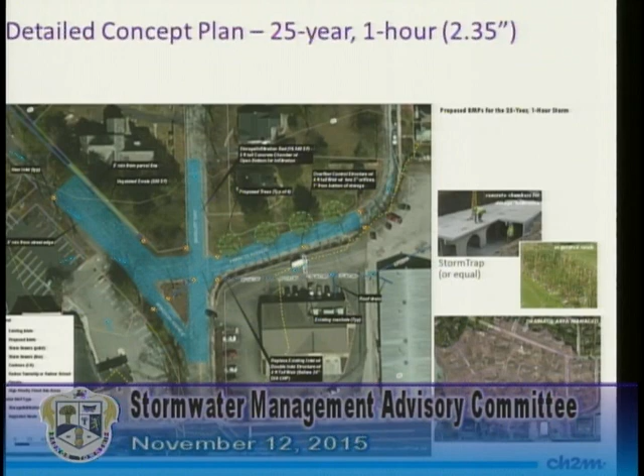I just have a few slides tonight. Wanted to start with a quick recap for those who maybe missed the board meeting the other night. This is the updated concept plan for Banbury, Francis, and Windsor, BFW. I presented a couple different options depending on how much storage we want to provide—whether it's a 25-year 1-hour storm, about 2.4 inches, the 10-year 1-hour at 2 inches, or the 5-year 1-hour at about 1.8 inches. Different options here, each with somewhat less storage, less depth required, and less area required.

Someone noted at the last SWMAC meeting that utilities were an unknown, and that may come up in the design phase of this project if it gets to that. So one of these options may need to be explored at that point—less storage to make way for utilities.

I presented these updated costs and flood reduction percentages. We gave a low and high-end cost for the project depending on the option, and the corresponding reduction in local flood volume depending on the storm event. The 25-year option, storage for the 25-year storm, will reduce 100% of the flood volume up to the 25-year storm, whereas the first option, for the 5-year volume, would reduce the 25-year storm volume by about 56%, just to give an idea.

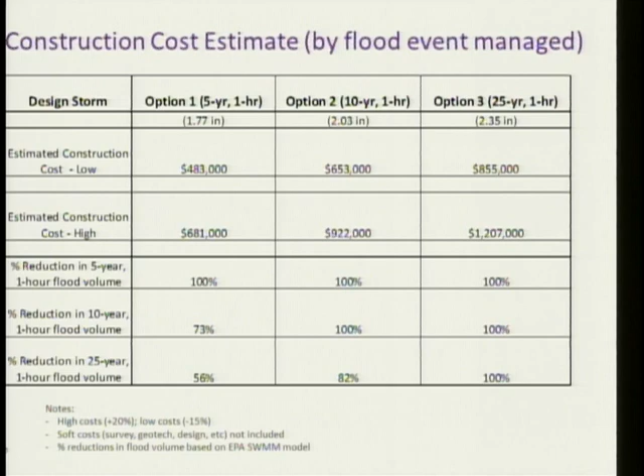The reason being is that the 25-year storm is so infrequent, and the flooding that we have tends to be almost like a flashy flooding. So some of those things, we just have to kind of keep that all in mind. And it depends, like say at this location, I'm in support of option 3. The reason being that this takes the load off of the downstream system as well. So it's not solely for this location that you're providing that additional storage. So it works harder for us when we're in these locations.

So I think you can't have a blanket 25-year, 100-year. I think it's got to be case by case. Look at the configuration, what's the land that you have available to you. Utilities are going to come into play here. Maybe 25-year isn't going to be feasible because of the additional cost, because we run out of space. We know we have some space because there's a system there already. So I'd be cautious. I mean, we could have a goal of 25-year, but I'd be cautious to make that a fixed standard. Sure.

I think the information you provided was enough so that we're comfortable at this point that, hey, this is a project that we feel is worth doing. But I agree with Regina, it is going to be site-specific. If we can, though, I think a 25-year storm is a really good goal, considering budget, location. And just for a comparison, I think Hurricane Sandy was on the order of 2.2, 2.3 inches. Now, that was not over an hour. And I didn't include the photos here, but at the board meeting, we had the photos of this site, I think, during Hurricane Sandy, and actually there was maybe another storm in there as well.

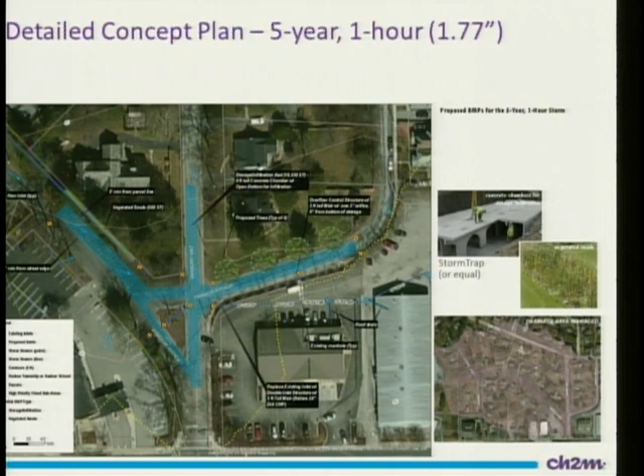The other thing I meant to mention, Commissioner Schaefer, I think her main comment was that she actually liked the idea of the bioretention. So taking up part of Windsor, closing that off, and putting in a bioretention there. That was something that Commissioner Schaefer, I think, wanted the SWMAC to reconsider. And I don't know if that's entirely up to us. I mean, I think that's something that the township has to decide if they're going to close a road. And if that's something the township and the residents want, then obviously we want to put in a BMP there.

Mm-hmm. Whether we close the road or not, any opportunity we can do best management practice, we could. But I think the township and residents need to decide first, to make that call before we can say yes, we can do it, or no, we can't. Well, honestly, I don't know that we can justify the additional cost and loss of efficiencies on this location. Obviously, we want to see that type of work where it makes sense, where you have extra space and things like that.

You know, you can put in bioretention facilities for very little money if you're not tearing up a road to do so. And already, you're going to have to establish that whole ground. You know, this is compacted roadway. It's not an ideal location to start that kind of a project. You know, we're not going to get the value out of our money if we pick locations that are very difficult.

I hate to use the middle school as an example. When we decided to build our middle school on that site, that drove the cost. If we were to build that middle school somewhere that didn't used to be a lake, I'm sure the construction cost wouldn't have been $50 million or whatever it ended up being. So that's the kind of thing where you have to be patient and wait for the right location and the right opportunities so that we can get our dollar value.

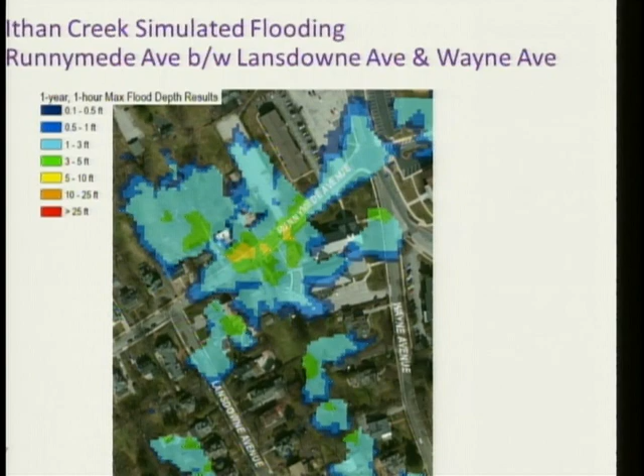And we talked about targeting these two public parking lots. The one to the west, owned by the school district, the one to the east is a township parking lot. I think, Regina, you had mentioned that. You thought that was school district. So this is the concept plan we came up with. We have a model for this using EPA SWMM, so a little bit more of a detailed model, since we do have more storm data in this area. We have that from the old base plans that were developed for the Radnor Middle School project. So a lot of this information is known.

So we are still in the middle of modeling this, so I just want to note that we don't have final results yet. But the idea here is we would have a system that could start up on West Wayne with a new inlet. We believe we might actually be able to pick up both sides of West Wayne in the system, but right now the concept plan is just showing the south side. Runoff would enter in, and it would kind of cascade down a series of stepping storage chambers, ultimately coming into a larger chamber at the bottom.

We did see some opportunities to integrate some green infrastructure into this, some bioswales. Currently, this is just a relatively flat asphalt area. There's no trees, there's no landscaping. So there's an opportunity there to break it up a little bit with some bioretention, some bioswales, possibly some new trees along the western edge.

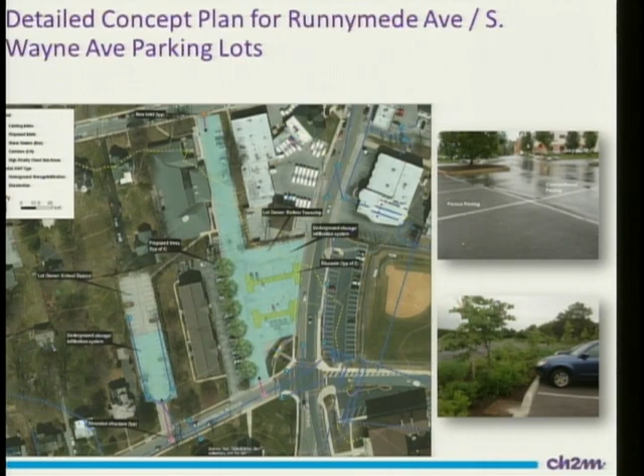And like I said, we're in the process of modeling this. This is a graphic from our SWMM model showing some of the pipe networks that we know exist. As we get closer to the middle school, we have more detailed information. Some of these outlier pipes, we do have some diameters and inverts, and we were able to use that.

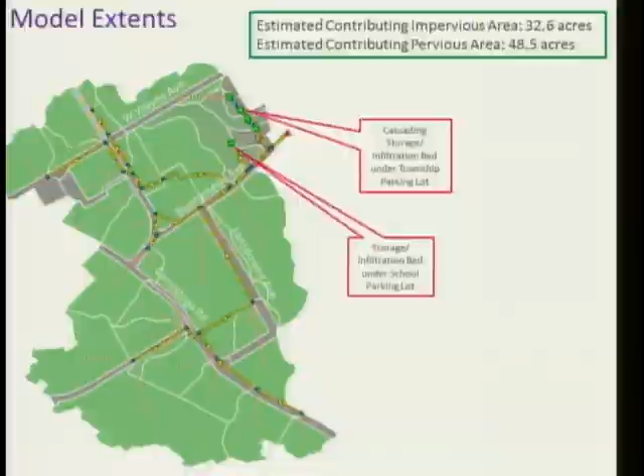Dan, there's some of those inlets, I don't know if you have them in your system or not, in grass areas. And they're not really functioning very well. And there are some inlets and even sometimes manholes that surcharge. So that's something you're going to want to find out a little more about, because the system is so overtaxed. The pressure from upstream is actually coming out of inlets and out of manholes in those locations, especially near the library. There's something in that section between the library and, I think, the school district parking lot.

Okay. That surcharges. So that's the kind of thing we just need to know. FYI. Right, yeah. I might be able to walk around there and figure out where it is and give you a little more.

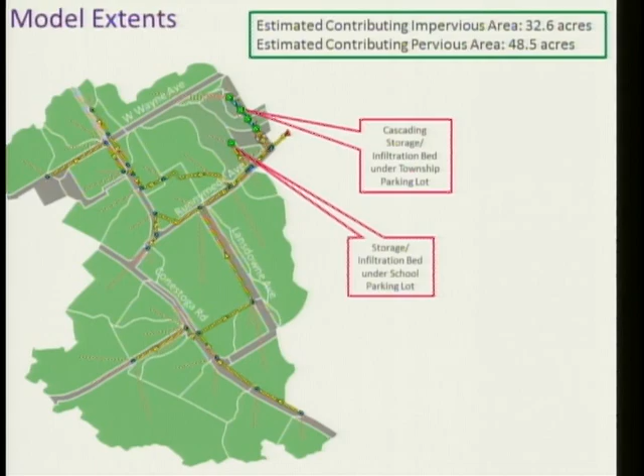Perfect. I should mention too, I think there were some discrepancies between this piping layout that we got from the old base plans from the middle school project and what the township data is. I believe specifically in this area here. We deferred to the base plans from the middle school projects. Was there a survey done recently? I thought there was some survey. Chagrin Valley did survey.

Originally, they were going to do a study here, and we pulled that from them, but they did a certain amount of survey work, so I had them send that to Dan, so he didn't duplicate any efforts. Right. And there's some overlap, but that's mostly up in here near the fire station. Okay, so that's mostly up in this area.

For instance, in the parking lot, do you have grades in that parking lot? Do you have good grading? Because that's got some crazy grading going on in there. In this parking lot? Yes, we do. Okay, good. That was part of the survey for the middle school. Yeah, I said it was flat, but what I meant was it was just a sea of asphalt, essentially. But yeah, there is some slope to it, you're right.

Yeah, absolutely. That's the reason the township has been waiting for this for so long, and one of the reasons we haven't spent a lot of money on that parking lot, because it was always anticipated that there would be a parking lot with green and trees, and it wouldn't look like it does. So this is music to a lot of us here for sure.

That's the thing too, when we are considering proposals, obviously we're trying to incorporate pedestrian safety, green space, and as we talked, the bioretention facilities, things like that, in order to make it make sense for the community. You might as well get the most for your money.

That's a great point, and that might even be an issue along West Wayne here. There's really no defined sidewalk. It just kind of blends right into the parking lot. So the idea of creating landscaping, again, bioswales, that kind of defines the sidewalk, I think, a bit better.

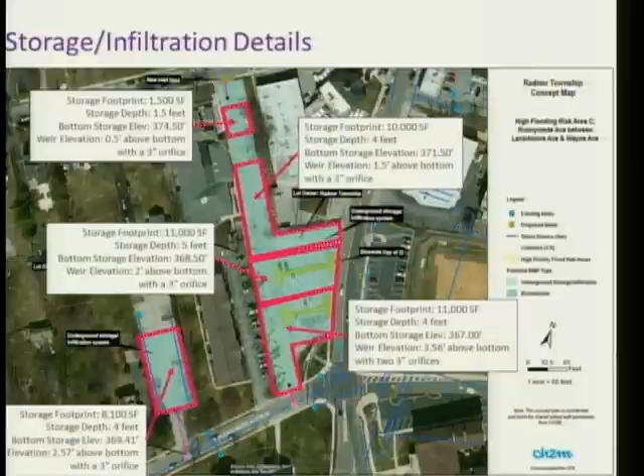Madam Chairman, if I may make a request. As in the emails I sent out, we have a very limited window for preparing any changes to the 5-year budget. In reality, we have to complete it tonight, and I have to submit it tomorrow. So I would request, if it so pleases the board, that we go to the budget portion. We have Dan's spreadsheet set up on the laptop, so we can physically adjust things with this board. You can see it live, and you can vote on it tonight. And then I can submit that to Bill White.

And not to, but I just thought maybe ODP could get very long. It won't take that long, actually, but we have literally no wiggle room on this. If the board wishes to amend this budget, we have to do so tonight. Could I go back to Runnymede for a second before we end with that?

I understood that we were looking to go upstream, so why aren't we looking up the hill from this place, as we have done with Banbury Way? I think we're looking at available space in this case. And also, I think it was a bit of a safety issue. There's flooding at the school, there's flooding at the firehouse, so on top of just the flooding in general of that area, it's a bit of a safety concern as well. But I understand what you're referring to, Paul, is that you would like to see it done uphill.

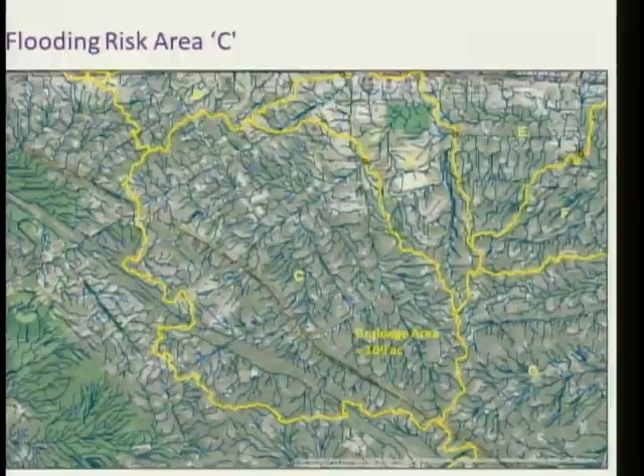Madam Chairman, if you do wish to go to the budget. Yeah, I think we should, if they need something by their next meeting. A very quick presentation to go over some items on those 3 projects I mentioned to you folks, and then you can. I think before we even talk about the new projects, maybe we need to understand what we're moving where on this list, because I don't know that you're going to move anything, but it's incumbent on me to bring this commission things that come up. Right, no, I agree. I kind of want to understand what has to happen on this sheet. You may not wish to change anything at all.

So there was a little confusion with how things went on Monday, as far as if it's on this budget and the budget is approved, then we don't go to the... Right, exactly. Is that correct? That is one of the pages of the 5-year capital plan. And if that goes Monday night and goes through the process and is approved, your 5-year budget as shown is approved. The only reason I brought this up was because at the meeting, I think that you folks watched, there was some additional modeling that was requested of Dan. And then the question gets posed to the commission, would you like him to include the ability to do that in some of the other studies you have asked him to do, which could conceivably change that price?

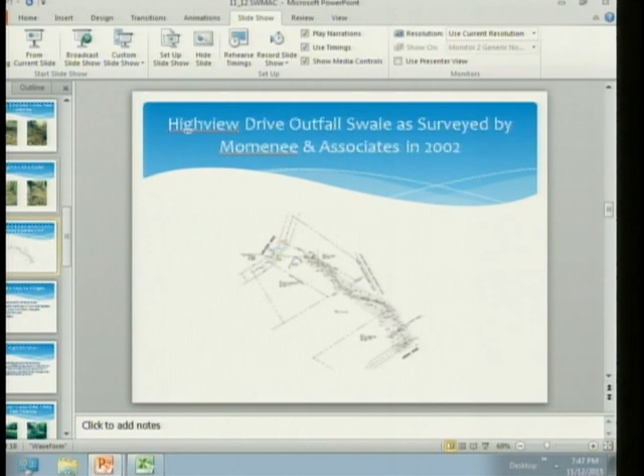This was brought to our attention by a resident who lives on Highview, who asked us to come over and take a look at this, and we all said, wow. It's very tough to access - it's between a house and a driveway to get there. As imaginative as we can be, there are ways to address these swales.

Paul's thought: reduce the volume of runoff to the outfall. Usually these outfalls are connected to an inlet at a low point in the road and taken away. So conceivably, you could work uphill of that, try to reduce flows, try to infiltrate - that's part of it. You can pipe the outfall, pipe a piece of it, or pipe it completely.

Some pipe, in this case, will have to be replaced. You can plant it, you can armor it, you can have check dams, you can have micro pools - there's a million things you can do on these swales. Got to reshape the swale. At one point, part of it was a trapezoidal swale; now it's just totally eroded, and it's erodible soils.

Or all the above. So my recommendation to this board - one of the ways we trip ourselves up is we try to give project costs before any amount of time has been spent on design. It's a somewhat nebulous number, based on some actual facts, but that's not including a lot of things we find out when we actually start to design. Do we need an easement? What does that entail? How hard is the permitting? What's the access going to do?

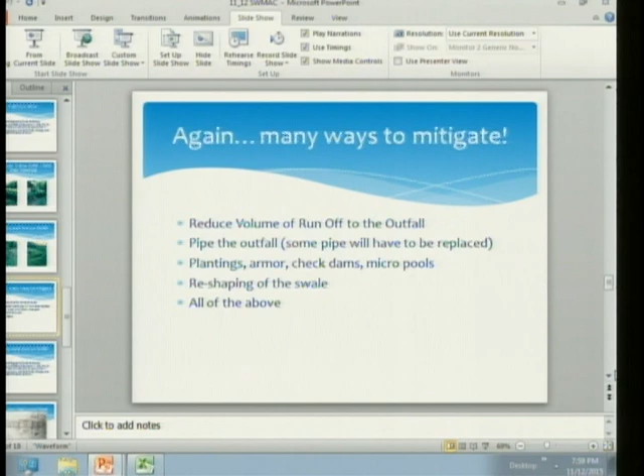There are concerns from the residents around there. They are concerned with their children. This would be a lot tougher to try to fence because it would be very odd to fence so much of this.

So I think the study's going to show that we get sizable flow down here. But we don't need the study to tell us we have this eroded swale that is a concern to the residents that live around it. And where we place it, or where this commission places it in the scheme of things, is going to be up to you.

So this one was another one where I'd request that we do whatever we need to do as far as bidding documents, design, survey, all that good stuff next year, and then move into that process to get a probable estimated cost of construction, and then go into '17. That's just my recommendation. But I don't have a recommendation on the construction because I don't know what we're going to do.

The next one is Mill Dam. I'm assuming everybody's familiar with the Mill Dam, right? So Maplewood Avenue, which runs along Mill Dam, is actually the dam embankment. About two years ago, I noticed the road settling, and we did some investigation, and we really didn't see anything. I saw it again last year, and it brought concern to me.

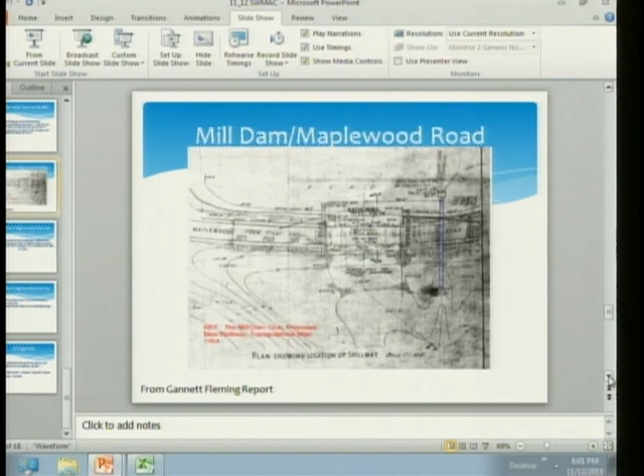So we went to the board, and I asked to have Gannett Fleming come out. Had some geotechs come out and take a look at it, and we further refined that and requested a proposal for their dam group to come out and see what is wrong with this, which they did. You do have the report, and the reports are on the back table.

So just real brief: the bottom line is there's an abandoned, I think 33-inch, what we call a stovepipe that runs through the middle of the dam. It's leaking, and it's causing the subsiding of the road.

They provided some numbers - let's get back up. They provided us with numbers in that report. So they said the permitting, design, and bidding documents would be roughly $45,000. And the construction, they gave a range of 150 to 200. I used the 200. And on a project like that, we would have to have daily inspection all day. We can't do dam work with partial inspections of somebody stopping by every couple hours.

Again, my recommendation to this committee would be that in 2016, we move forward with that design and permitting to get this project done. This is another safety project, and I'm not trying to alarm anybody, but obviously if the dam failed, that would be problematic to the people downstream. We actually do have a plan for that, and that's required by DEP, for what occurs if the dam starts to breach or fails.

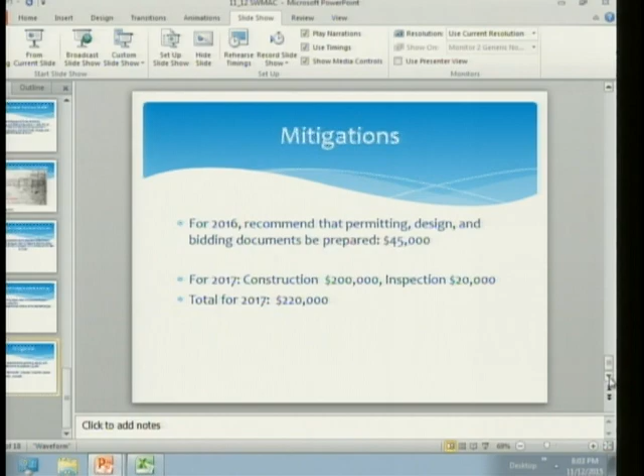And then my request and recommendation would be for 2017, we move forward with the construction and inspection, which would be at $220,000. So is this the township's responsibility? Does Mill Dam, does the club hold any responsibility? Does DEP consider them to?

No, this is ours. So the Maplewood roadway is the dam. The roadway is the dam, and it's a township road, correct. So it's fully owned by the township. And there's actually a sluice gate, and in the documents, we do have an agreement with Mill Dam, and we're actually responsible for all of it. We pay for the annual maintenance of that gate to make sure it raises and lowers, but actually a gentleman who works at Mill Dam is the one who raises and lowers it, because he lives 300 feet from there.

Do we know what hazard classification this dam is? It is not a high hazard dam. Okay, so is there any residential in the inundation zone? Oh, absolutely, yes. If this dam failed downstream, there's homes that would be inundated. Like I say, we actually have an emergency action plan. Because then wouldn't it be high hazard then? I don't believe it's classified that way by DEP. I may be wrong - I didn't put them in here, but there are DEP inspection reports as part of that report, and that's where it would be listed.

But a high hazard dam, so Earl's Lake, right, is a dam that they've been trying to decommission for 5 years. And it has issues, and it is considered a high hazard dam. That doesn't mean there's threats to life and limb, although there are people that live literally feet from the spillway. So that term high hazard is used differently in the dam world. But make no mistake, if this dam were to breach in a heavy storm or fall apart, that would be problematic downstream. Regina, just explain the implications of high hazard versus what, low hazard?

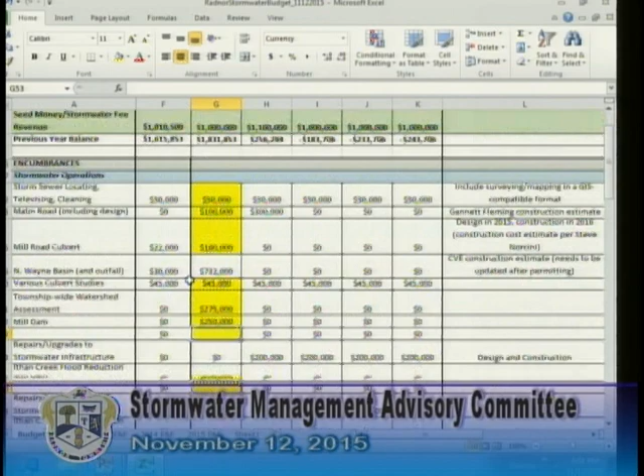I agree. I just had a discussion with Dan, we don't have 2.5 million to spend. Or am I missing something, Dan? Well, it looks like the stormwater administrator costs might not be on this version. Is that right? I don't know, we gave you everything we had. No, but those costs come out of here also, absolutely. So I think what Paul is saying is that the 2015 balance in this version was 1.8 million.

Dan, you bring up a good point. We need to include your year 2 costs, which were, I think, 70-some thousand. Right. It's in the spreadsheet. But am I seeing it here? It's not in this version, I think.

Well, I think one thing right off the bat is the Wayne train station. I think it's great to try and partner up, but when I see projects like this that are screaming for attention, that 30,000 has to go somewhere else. I concur. I'd love to partner up, I'm not saying it's a dead issue, but if we're going to do the worst flooding and the most severe infrastructure projects, the Wayne train station, in a perfect world, would be fantastic to do. So you just want to move it out a year? Or move it to something else.

You have to do something with the 250 you just added. Right. So I'm saying just put 0. Push these back. So four years from now? Well, no, what I'm saying is that it would start in 2017. Right, that's what I'm saying. Just shift it over one. Shift it, right. Both of them over one, just copy and paste. I guess you can't do that.

So the design would be in 2017? Design and construction, or just design? Just the design, and then the construction would be out one more year. Because who knows if it's ever going to happen? For my own edification, so we're talking about the Wayne train station enhancement. Right, because that was something we were going to partner with.

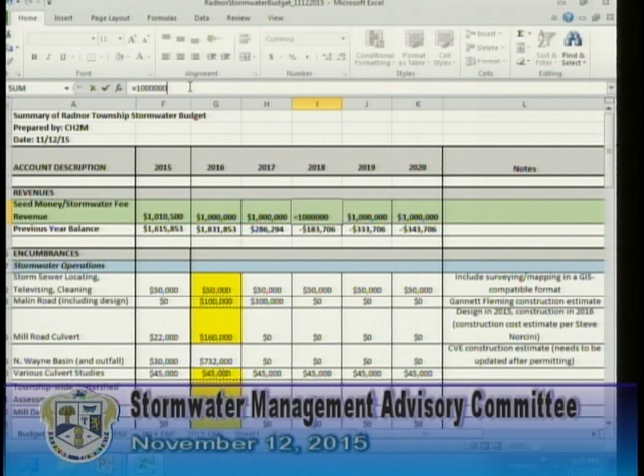So we had $100,000 from PICO, right? I thought it was SEPTA. Pardon me? SEPTA, sorry, yes, SEPTA, my apologies. We had $100,000 from SEPTA, and the township, as part of that, agreed to kick in the design cost. Now, that design is underway, right? We've already spent money on it. So that 30,000 has to stay, is that what you're saying?

Yes, I do. Well, I guess the question is, how far along are we with it? I'd have to check the bills, but we're probably halfway. Remember I was telling you folks in the email, we haven't been able to do our infiltration testing yet? But we have a preliminary design on that. Well, if we've got a preliminary design, I hate to just cut it, because then you just wasted money. Agree. So I think now it's got to stay in. Ay, ay, ay.

Then to make it be built in 18. The 100,000, that's not a match. No, that was SEPTA money that was given to us. So that's actually added in as revenue. But the 30,000, is that expected to be spent this year? Get on that property, Dan, yes. I think we will spend it all, if we can.

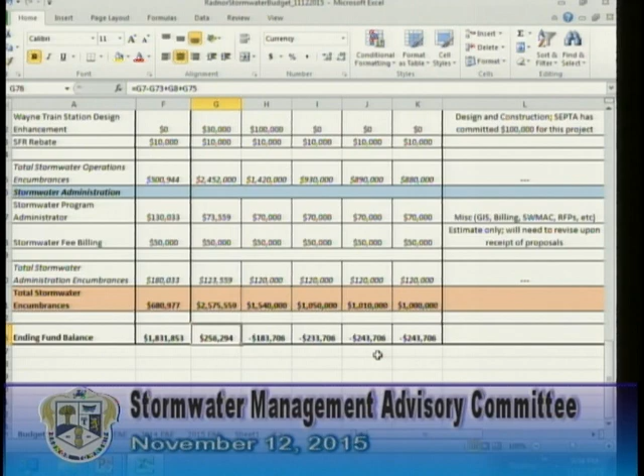Well, Dan, can you just tell us how much we're over by, according to your estimation, so we know we have to cut something? About 250, because that's what we added. Well, right now this is showing for 2016 there's a balance, there's 250 left in the budget. But then as we go out, we end up below 250,000. Oh, so we're okay, you're saying, for 2016? Correct. Okay, all right. So the additional, it says Ithan Creek additional projects, 50,000.

I think we just need to put it, like Regina said, just like Ithan Creek capital projects, whatever you want to call it, and leave it at that, because we really don't know if we're going forward with Banbury or the parking lot. So we can see a total, at least, of what we have for the Ithan Creek projects, or sites, or whatever you want to call it.

Yeah, I think that's fine, which brings me to the point: if at all possible, if one or more members of the committee could come to Monday night's budget meeting, because there may be questions on this. I can answer many of them, but I can't answer for your thought on how to get there. Because who knows, let's say we can't provide enough information to the board, so they don't want to go forward with Banbury, but we can with Runnymede because we have additional survey information. I'd rather not say which specific project. So that was what Regina was suggesting earlier.

I'm fine with that. Well, what did we decide to do about the North Wayne Basin? Did we want to call that a more general term in case that doesn't happen that year, so it can be spent on something else and then shifted? Like line 58. We have 100,000 for Ithan Creek flood reduction project. How about just change that to flood reduction project? Take out the Ithan Creek, take out the Midland, combine those two figures, and you get the same result if nothing changes. If things change, then you swap out whatever it is that you're going to do.

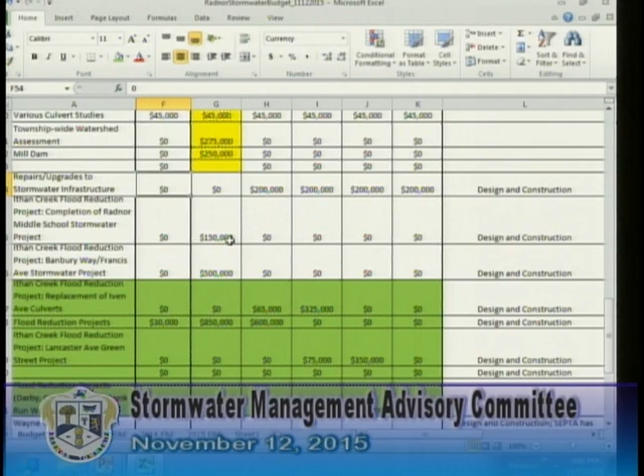Can we scroll down to the bottom and see where we're going to get the extra 250,000 from? Well, the other thing is that the Banbury Francis project at 500,000, that's at the low end, so. I thought we were combining that one too, are we? What did we decide? I'm just losing my mind. That one's further advanced, so we want to keep it separate, but then we have to up the cost, double it basically, because we're talking about engineering and construction, right?

Can't we put it across years? A project like that, I could see getting done in 1 year, but if we don't have the money, then obviously we can't. Well, I'm just going to double it for now. And then, we need to remove 211,000. More than that.

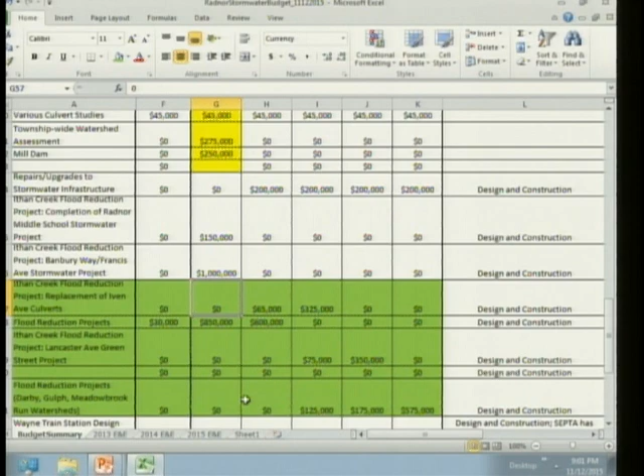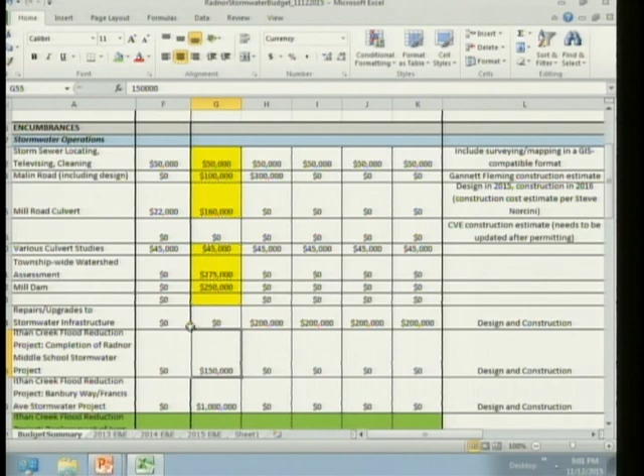I thought we were going to push one of the projects, the Malin Road. Did we change that? Oh, you did change that. That was pushed. It's just changed. We need to get rid of something. What we need to do is get rid of either Mill Dam or Mill Road. It's got to be one or the other because they're both 200.

Can you refresh my memory on the Mill Road? It's a failing culvert. And that was something that was pretty far along. It's in bad shape, yes. I don't know that that can be delayed. Can any of these things be appropriations? Because we have an issue here if we have failing culverts and we don't address them, you know? Is there a fund balance this year or anything that the township can address one of these immediate needs with?

I mean, that could always be a request. I think the whole assumption of the Stormwater Fund was that it was going to take care of these. I don't know that anybody realized, and Paul brings this up pretty regularly, how many problems we have found with our infrastructure. That it's a serious problem. So where are we with project money? We have project money only for flood. Yeah, I think we have to put Banbury in with the general flooding reduction.

Well, here's another savings then: the stormwater fee billing. We had 50,000 a year, but that's going to go way down. I know you're still going to have some involvement in it, but you'd have to tell us. Down to what, like 30? I think like $5,000. No, I'm kidding. I can't speak for Dan. Darn. Well, maybe we should put like a 10 then. Sorry, I didn't mean to cut you off. Go ahead.

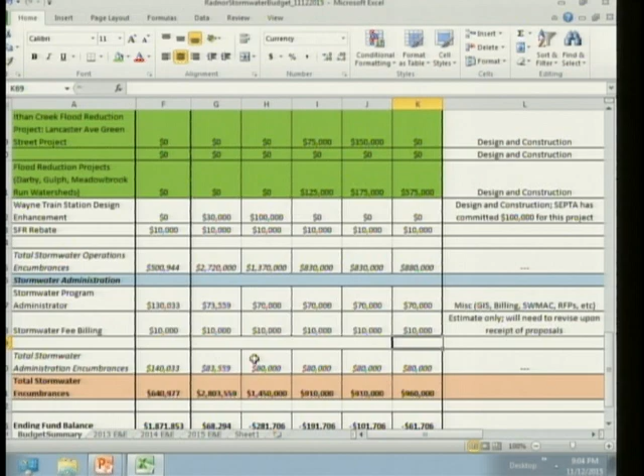So I want to ask a hard question. It is the case that we have a lot of repairs. And so should we be shifting the improvement projects backward in time to, say, 2017? Because we don't have the money. I think we have to further pursue some of that information and get a better idea, because for me, safety is one of my primary decision tools, because if it's a safety hazard, that just has to come. Yeah, so I am saying we have to do certain repairs. Flooding can also be a safety hazard in some instances, too.

I hear you, but, okay, where are we getting the money from? So I don't know how we make that determination on the spot, like which goes to what. But just correct me if I'm wrong. We do this budget, next year we do this budget again. We can make adjustments to it. Yes, you're not supposed to completely throw it out. It should be somewhat reasonable, but we're going to be in a much better position next year when we do this. I agree. But as the commission moves forward, at one point your 5-year budget's going to be relatively stable, once the studies are farther along. I mean, you're a fledgling committee with a first-time 5-year capital budget from that fund, ever.

Let me ask you a question from a realistic standpoint. You might not have an answer. What are the odds that we're going to need the funding for North Wayne Basin in 2016? God, I'm opening a can of worms, and I really don't mean to upset the apple cart. I'm just thinking we're almost at 2016, and let's just say they cleared everything that they needed to with the school district. Would they need that 732,000, have all the permitting and all the testing and all the design and all the approvals done in 2016? Could we put it to 2017? It might not be an option. Yeah.

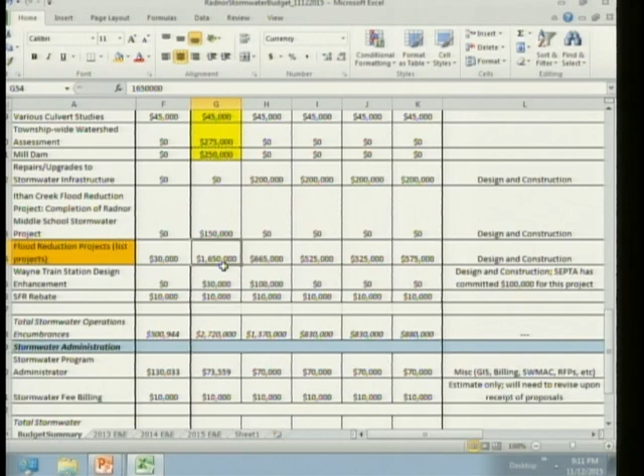Yeah, so if one of those projects doesn't move forward, something else will take its spot. And then in the next year, we're going to have to reduce that 665, because that's really the only non-fixed amount.

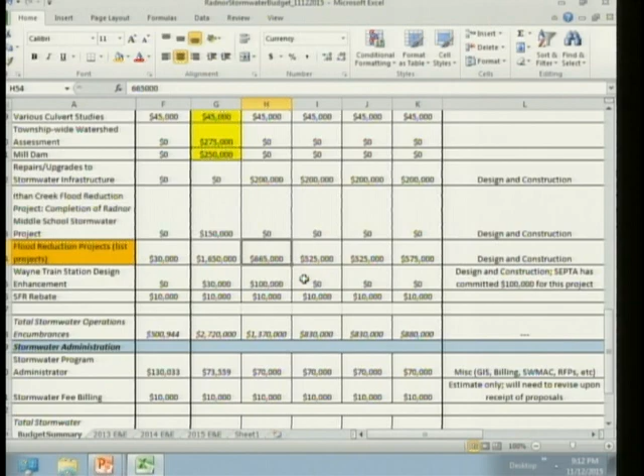Isn't that the only one that's really discretionary at this point? Well, putting it to 400, but let's see what happens with the upgrade. We want to put 52 down to 400 probably for that year. What about the number column or row 52, the 200,000?

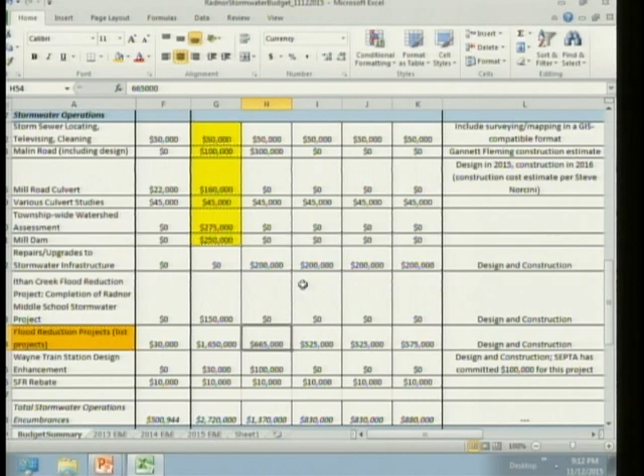I think, given our past history, we want to keep that. We're not- because we kind of moved it out since we already identified where those repairs are, and we spent more than 200,000 this year.

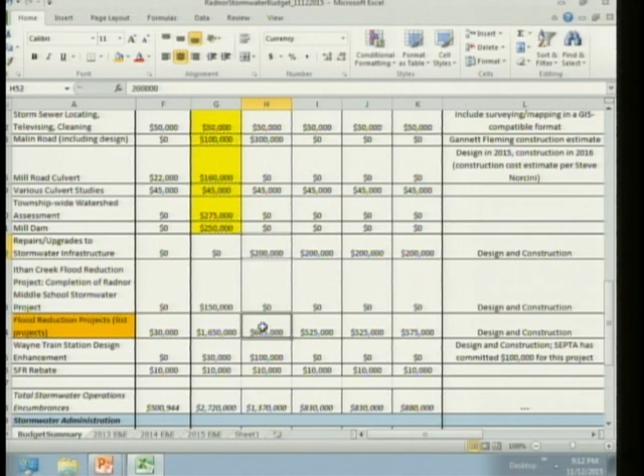So, maybe we need to think about increasing it, but I think we just have to adjust line 54 and back into it. So what year do we have to cut?

In 2017, I want to say, is that where we're taking out 250 to make the balance work? We're quite close there but not quite. And the SFR rebates, that's small.

Why don't we decrease the one in 2015? Because that could fix our problem, since we know we're not spending it. We're not spending 10,000, it's almost the end of 2015, we've got 1 month left. So put it down to 1,000.

Scroll down. We're getting there.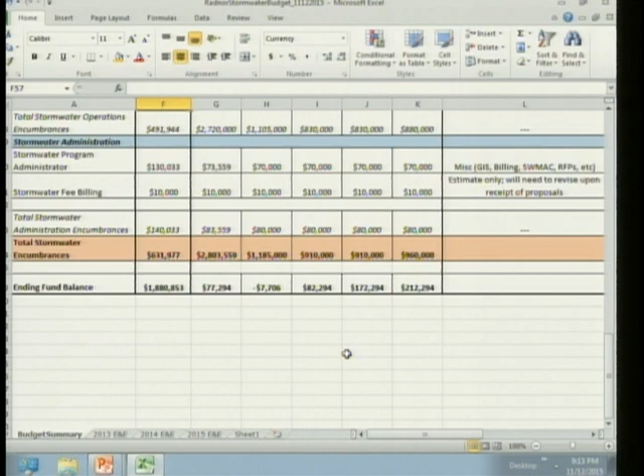Realistically, we've got rebates at 5 and 7,000. Make the rebates less, maybe 5 and 5, and next year you could just step it up. Make that one 5.

So given the kind of projects you're dealing with, I think you're okay. If, put that back to 10 and then scroll down. Let's take a look.

Something in 2017 that looks high.

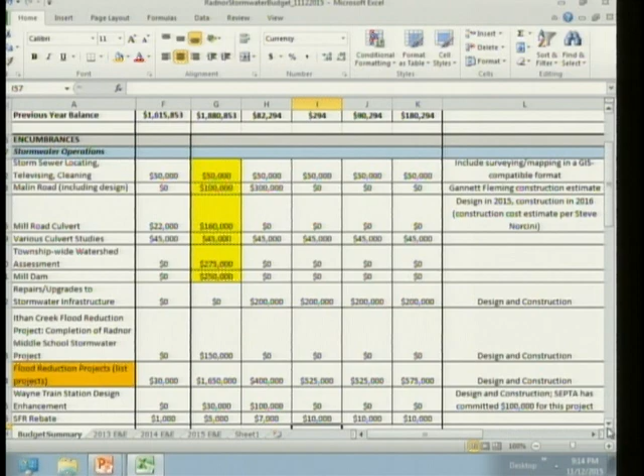The Malin Road number, is that a pretty good number we can count on? I believe we got that from the report. So that's pretty real, a recent report, so it's at today's costs. Okay, 2017 is going to be a light project year, if at all.

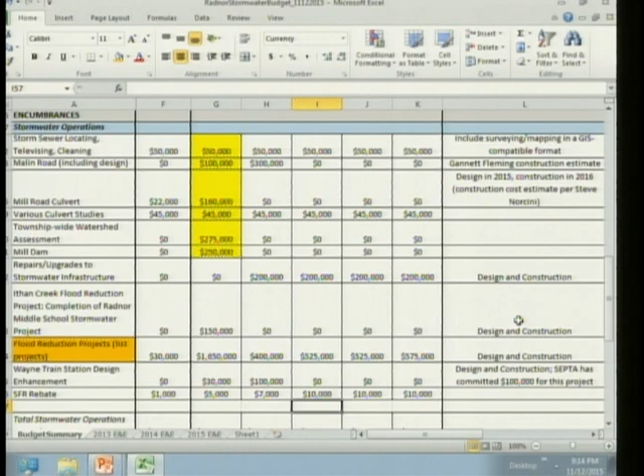Well, not really, because we're doing the Malin Road and 200,000, $400,000 worth of stormwater infrastructure. So that's new projects though, for new capital. About 400,000 — you folks have a huge task, there's been 50 years of issues building up.

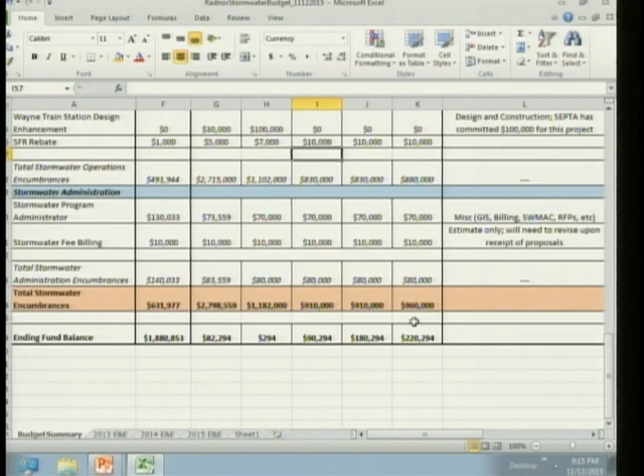And you have a certain amount of money you're trying to solve many, many problems with. As Commissioner Schaefer said, it took us a long time to get here, it's going to take a long time to get out. You can't do everything, you're not going to fix everything in 5 years. I think everybody up there wants to, but it just doesn't work that way.

Regina, we should put something in for ODPs. Money in for ODP? Well, we didn't. Oh, no we didn't, that's fine, we didn't get there yet. We're not going to be giving them out next year likely, anyway, right?

Or if we do, I'm hoping we'll have some surplus somewhere else, and could we lump that in as a capital type thing if we're proposing to work with something. A year that's light by $400,000, that might be the time to do it. But I think right now we're barely making the numbers work, so for 2017 I don't see where we could cut anything, but it would be nice if we could.

Hey Steve, I hate to tell you, those 3 projects you came forward with tonight — they can fall under repairs, so that's not necessarily a problem.

For something like an emergency repair, do you have funding coming out of here for that? Do we have an emergency line? What would that fall under if you just went out there to stabilize it? That's probably something from operating, Regina, if we're just — that's small enough that we don't have to. I have a purchase order in for I think $15,000, which when we first looked at it we thought might suffice, but it may just become a stopgap measure. But if a true emergency came up, it's going to throw all your numbers off, like Shimoni Road Bridge.

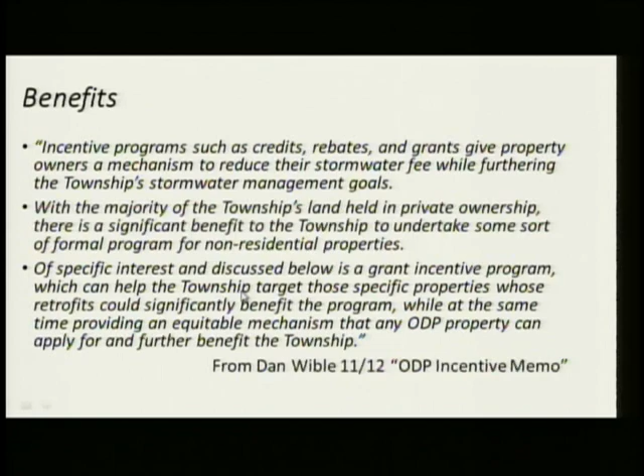So give the owners a mechanism to reduce stormwater fee while we get to pursue our goals. And with the majority of the township in private ownership, it makes sense for us to try to do something like this. And Dan was proposing a grant program, and I'm going to talk about that, as well as a program that the folks who were on the ODP program before had come up with last year.

So possibilities: one is to do nothing, don't have an ODP program or a grant program, maybe because of expense or complexity. One is credits, which is an ongoing fee reduction. One is a grant, where you reduce the fee in the year, say, of construction, and that's all. And then there's a combined grants credit program, which is done in Lancaster—I'll talk about that. And then one is what we're calling a targeted credits program, where you just aim at certain people who we would like to help us with a particular stormwater project.

So issues to consider: one is, what are you going to do with the fee? You're going to reduce it none, as in don't have a project, don't have an ODP project credit program at all, partially, or full reduction.

So none, I think we would say, if we're going to have any program, obviously we're going to reduce the fees by some amount. Dan made the argument that, and we've made this argument ourselves, that if you're a part of this township, you should pay some sort of the fee. Even if you're managing 100% of your runoff, you're still using the right-of-ways, and so you would have to pay something.

And so the elimination of fee completely wouldn't be equitable or responsible. And so we argue, okay, so no full reduction—that means partial reductions. Another point to consider is inspection and enforcement, how often do you do this? We're proposing every 2 years, as you'll see in a little bit, but there is a cost associated with that. And so again, we have to weigh cost against how much we're going to get from this.

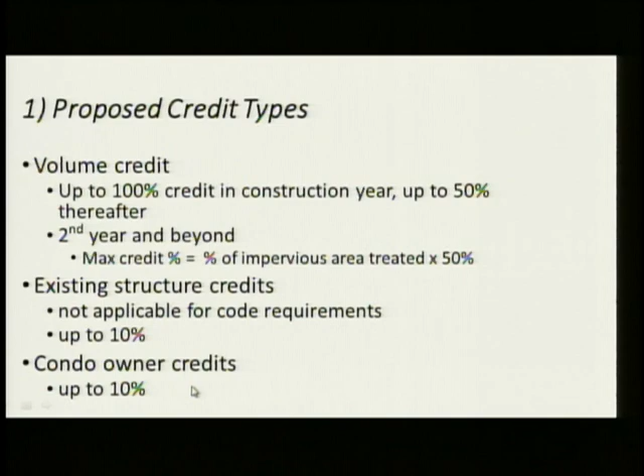We said we thought there should be an existing structure credit. So if you have a structure that was built to meet code, then that wouldn't apply. But otherwise, we'd give you 10% credit for maintaining that system, basically. And condos, we wanted to acknowledge there, and so up to 10%. But again, the amount of money that was involved is a very small amount.

What would be the application process? Well, first of all, you'd have to have an ODP property in order to be eligible. We want to make it very simple. It'll be a one-page application. There's lots of one-page applications out there in the rest of the U.S., requiring a professional engineer verification.

How would we time this? So they'd have to be submitted before the start of construction. We'd set a certain date so they could be batch processed. We'd respond within a certain number of days of application, again determined by Public Works, and then we prorate the credit to the date of filing.

If a credit is denied, they can address the deficiencies and resubmit the application once, but the second review is final for that particular calendar year. No further appeal, okay? And we make it a 2-year credit program; it was like 1 to 5 years is what different places went, and we thought 2 years was a good amount. Renewal process would be engineer certification that the system is working, and that'd be submitted to the township.

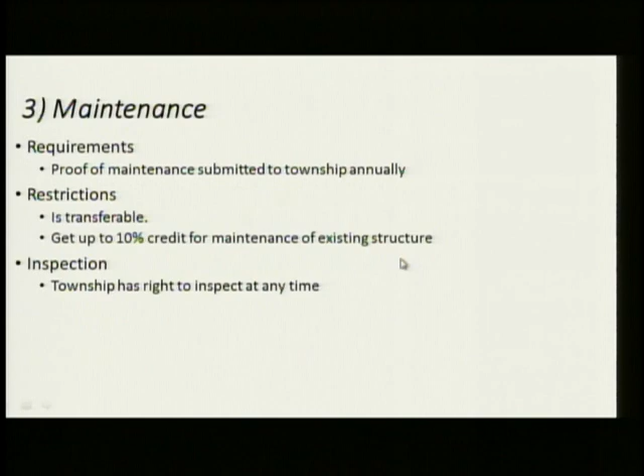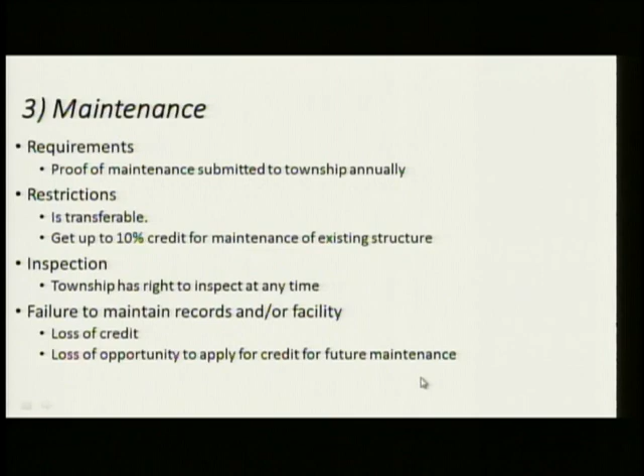Maintenance, obviously really important. So proof of maintenance submitted to the township annually. We said it could be transferable if the property is sold. We wanted to give some credit for maintenance, again, just to help people realize that it has to be maintained and give them some reason for doing so. And then the township has a right to inspect at any time. And if they don't maintain records or the facility, they lose the credit and they wouldn't be able to apply for future maintenance because they're just not doing what they said they'd do. So that's that particular program.

Clearly, cost is an issue. It's more complex than the SFR by a lot. I'm not sure if there are other questions. I'm, again, putting it out here right now just so we all see it. But, so obviously there's other stuff we could think about.

Another one, and again, this is what Dan was saying in his letter, is that we have grants available to all properties on a first-come, first-served basis until we spend whatever budget we declare. So for instance, we may pay some portion of the first-time capital costs for a retrofit that, again, is outside of what's required by code. And then we would also take the extra step to reach out to targeted properties, properties that we think would help us with a particular project, to encourage them to apply. This is done in Lancaster. We're not sure about Philly, Dan was saying, but in Washington, D.C.

And then we'd set up a policy about how they'd be used. So it might be we pay for design and/or some portion of construction and/or maintenance. It's, again, our choice about how to do that. Different municipalities have different ways of doing that. And again, Dan was saying one thing you could do, and is done. Dan, you might want to explain.

Sure. In Lancaster, PA, we help them get a low-interest loan through the PENNVEST program, and we put out a unit-price based contract. So a contractor was selected to install some number of unspecified green infrastructure projects throughout the city before they were even designed, just based on standardized details and specifications so that they can come up with unit prices. But the advantage of this is then the private owner gets the benefit of lower costs, because now it's part of a much bigger contract. Thanks, Dan.